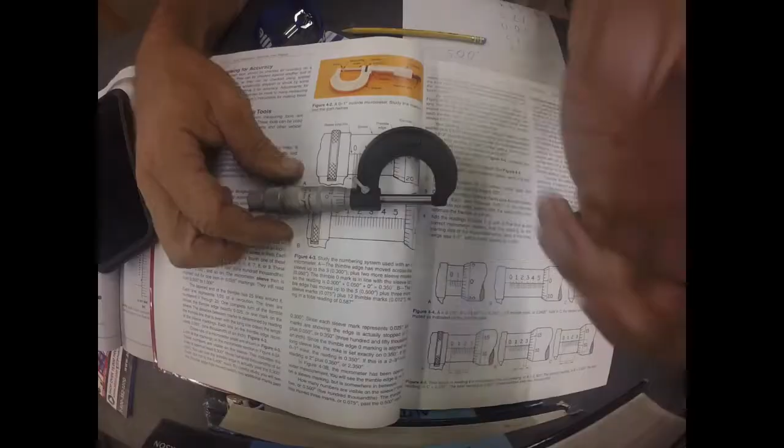Okay guys, welcome back. What you are looking at is a micrometer, this one is a 0 to 1 inch. Right now there is 0 gap in this piece of metal. Each one of these lines is equal to 1/1000th, so that would be 1/1000th of an inch opening. You can't even see that there's a gap there right now. I can't even fit a piece of paper or a human hair in between it. That is 1/1000th of an inch.

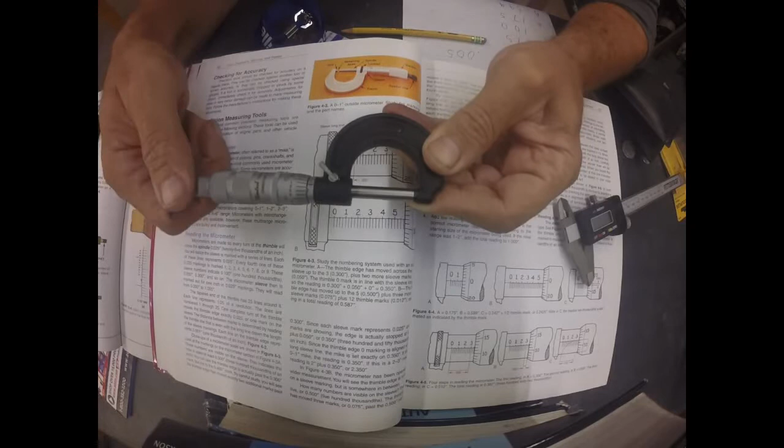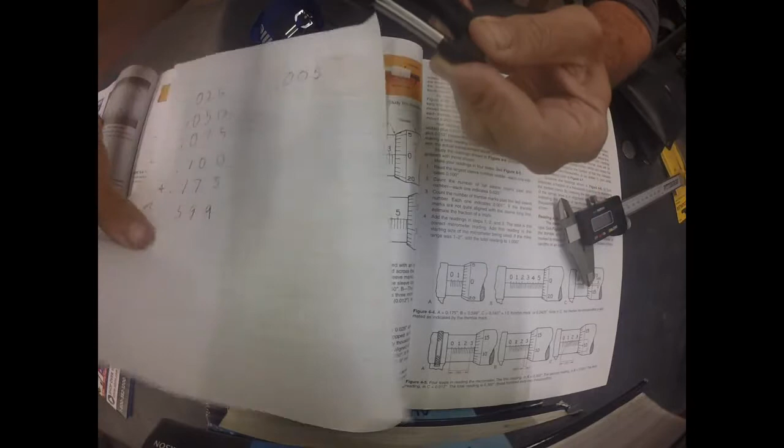You can tell now that I'm opening it, so now you might be able to see the gap. But I had it at exactly no gap, 0 on 0. I'm trying to teach you how to read this. So the first number I'm going to come to is opening it up to 5/1000ths. There's a very small gap. What that looks like on paper with math would be 0.005. When we go to cut rotors, that's about how much material I remove every time I make a pass on the rotor. Let's move to the next number.

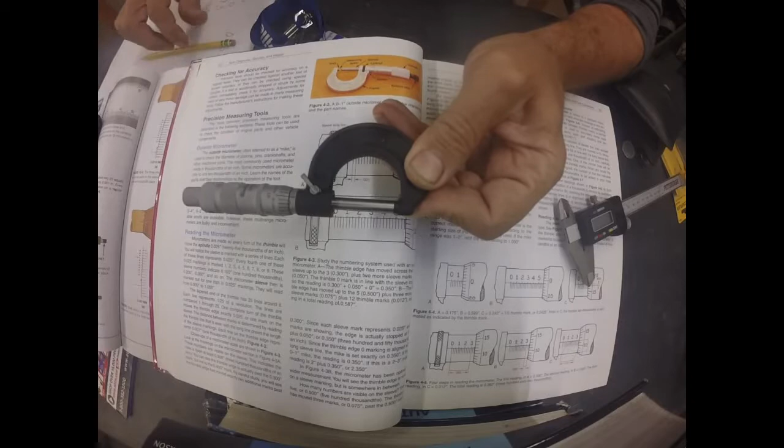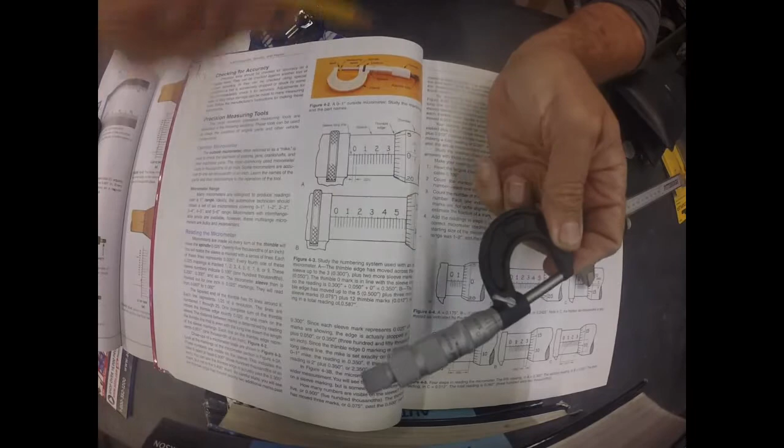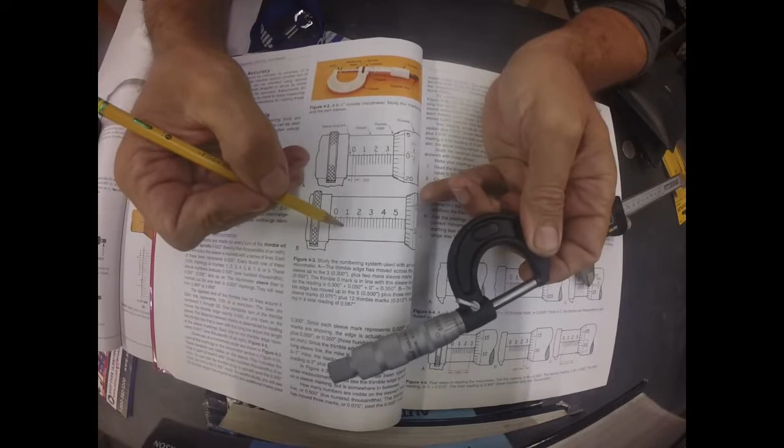So we're going to go to 0.025. I'm back at 0 again, but now we have one full line. If you look at the sheet, I have moved this piece right to this line. When 0 is lined up with this very first line, that is 0.025. This is easy to remember if you think about money, each one of these lines is equal to a quarter. So we have 25 cents, 50 cents, 75 cents, $1. Right now I have it at 0.025.

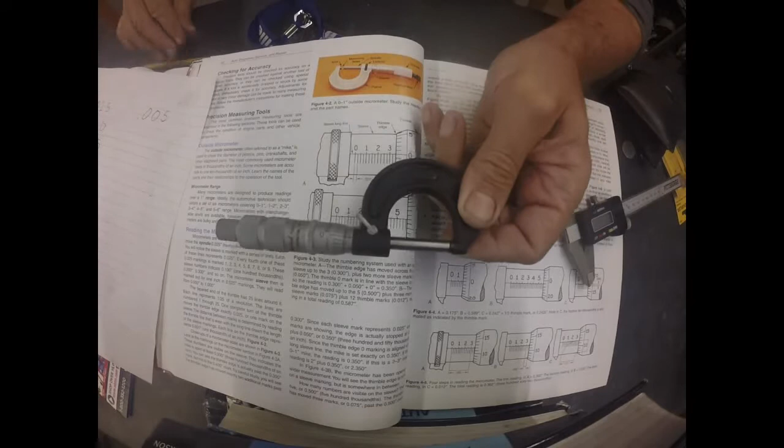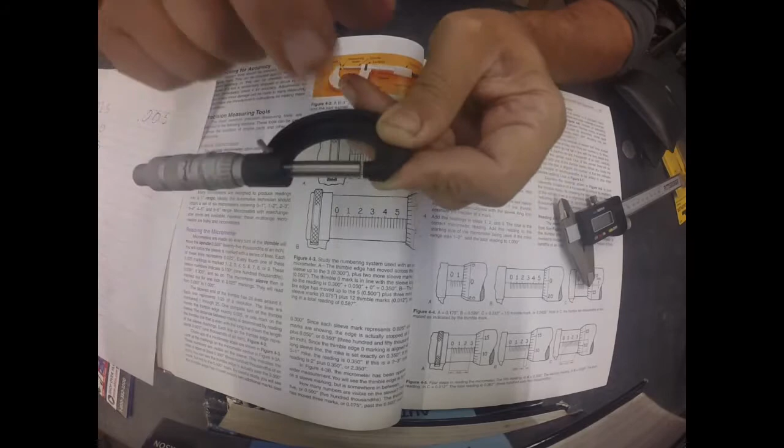Now I'm going to open it up another 25/1000ths. So I got 5, that would be 30, 35, 40, 45, now we're back to 0, 50. Now you can see there's a gap, that's 50 thousandths. So what that would look like in a decimal would be 0.050. Very small gap in my tool.

Now the next number we're going to do is we're going to go to 75. I'm going to go, now we are at 50, 55, 56 — see how there's a little 6 there? That would be 56 — 60, 65, 70, back to 0 again, 75. Now there are 3 big lines, so what we're looking at is that we are right there. We have 3 lines: 25, 50, and then 75. So 0.075.

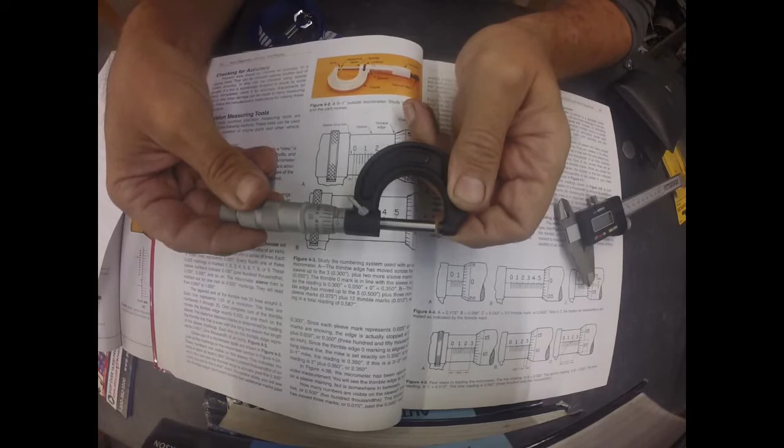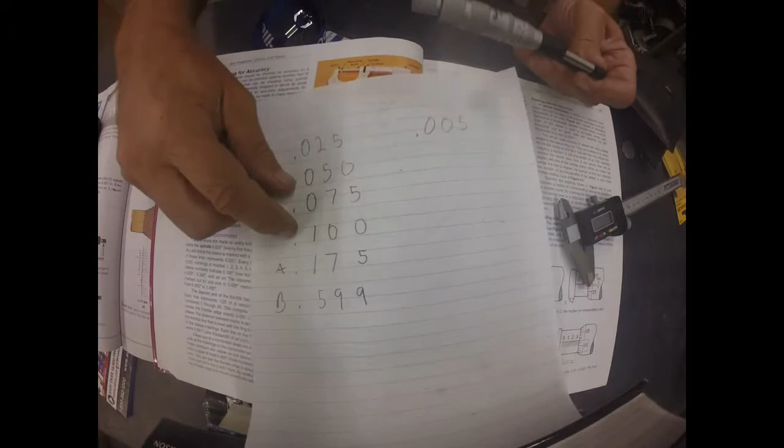So the next number we have would be 1. I was at 75, let me go back to 75: 75, 80, 85, 90, 95, 100. So if we had, say, a piece of metal we were measuring, that would be 0.100. So that would look like, on a decimal, 0.100.

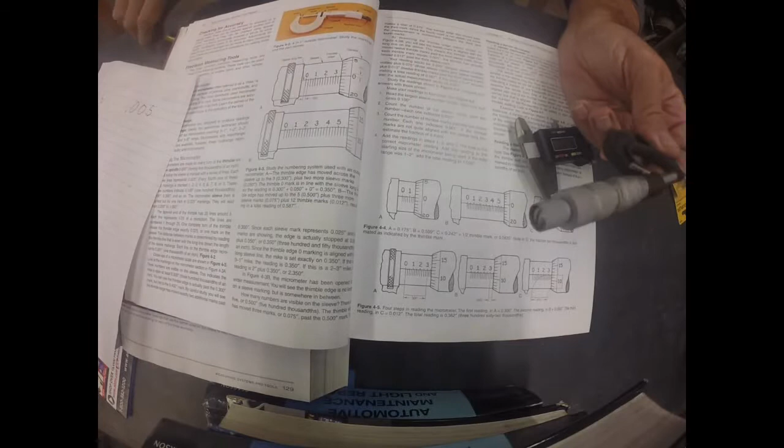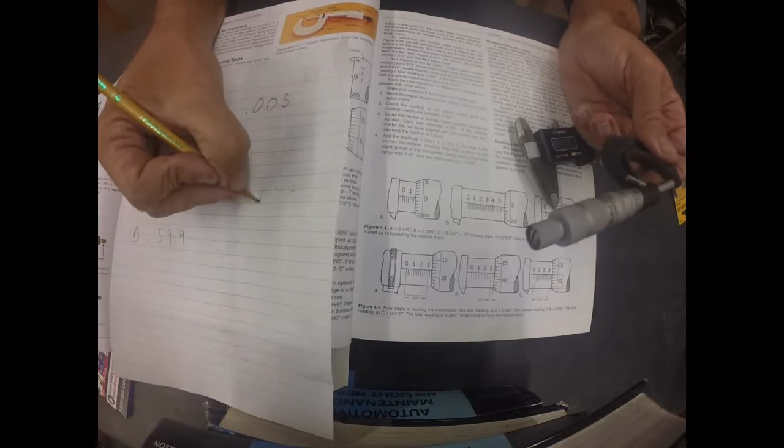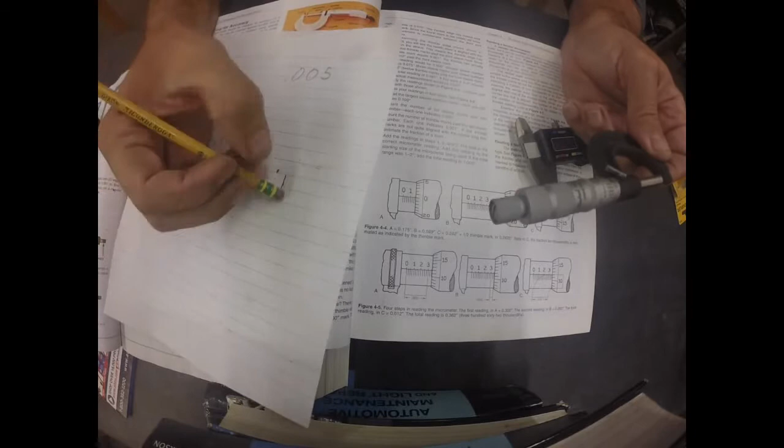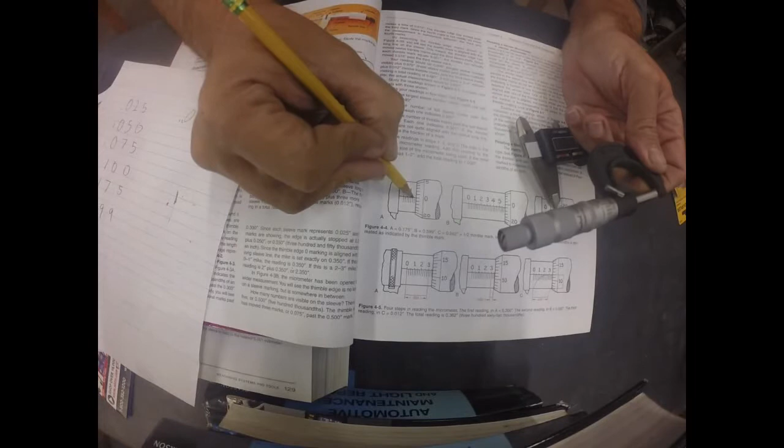So if we look at this image right here, and we start counting: 25, 50, 75, 1. Let me write that down. So I got my first decimal — ah, got it wrong, sorry, it's hard to draw upside down and backwards. So I got my decimal, and we are definitely at 1. Now we got to figure what else we're at. We're at 25, 50, and then we have this gap, and it's all the way up to 0, so that must be 75.

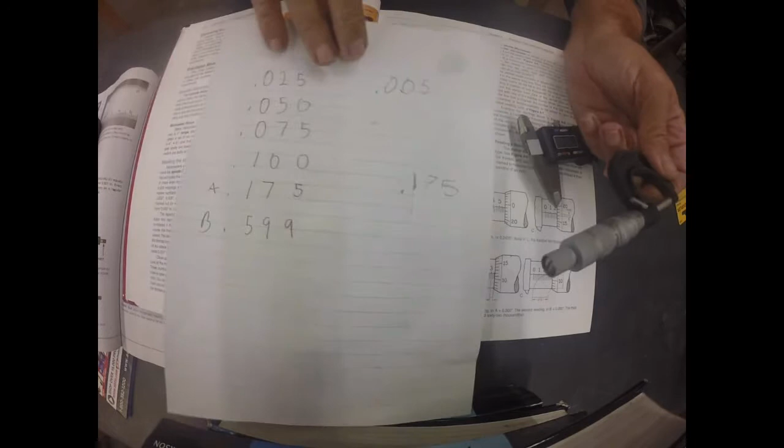So we are at 175. That's what letter A is doing here.

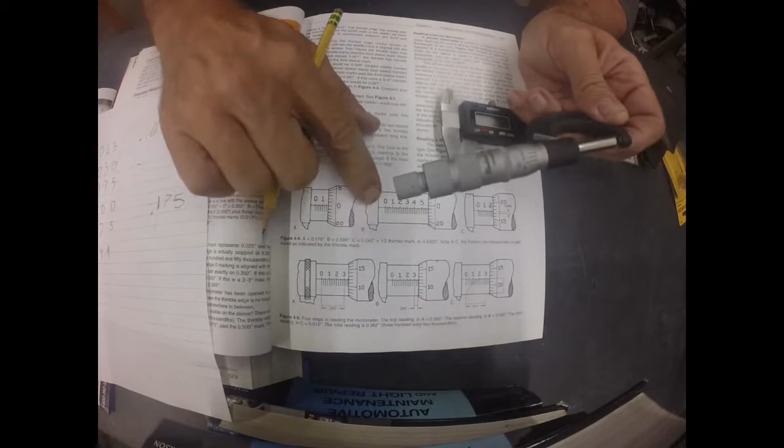Now let's try to get a little bit more complicated. So now we got this number, letter B example. So we're starting at 0. We know we got 5, because that's the last number we see. So we are at 0.5.

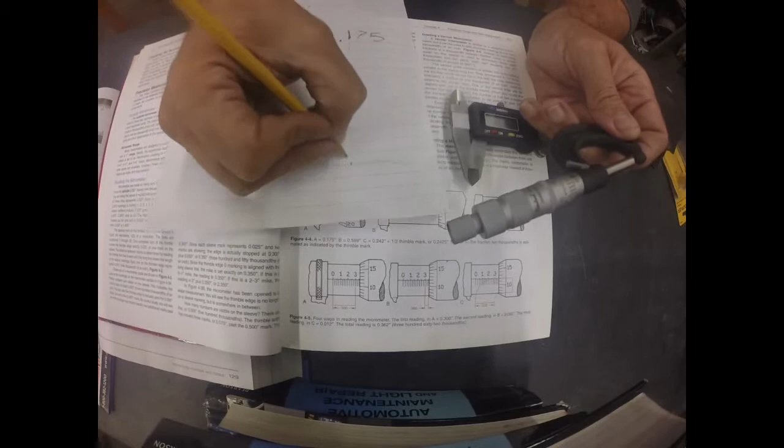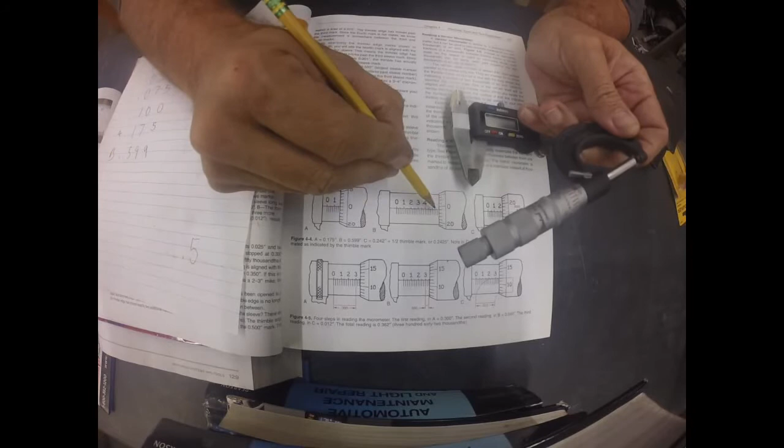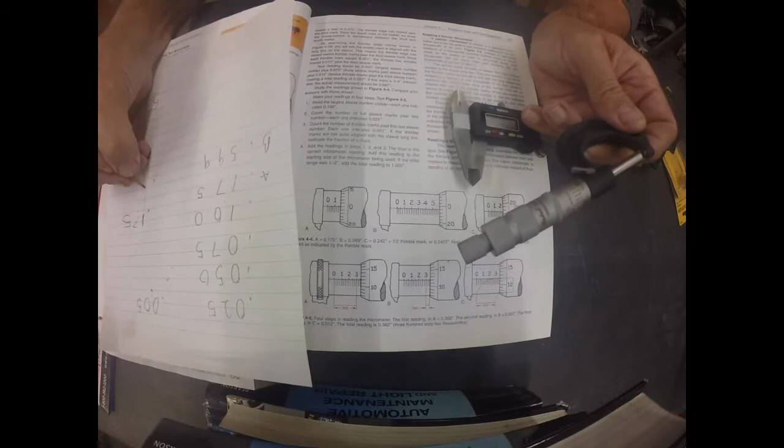I'm trying to write upside down, I don't know if I can do it properly. But let's count what we got. We got 25, 50, 75, and then we're almost all the way back to 0, but we're not quite there. So that would be 5, 9, 9. So almost 0.6, so 5, 9, 9.

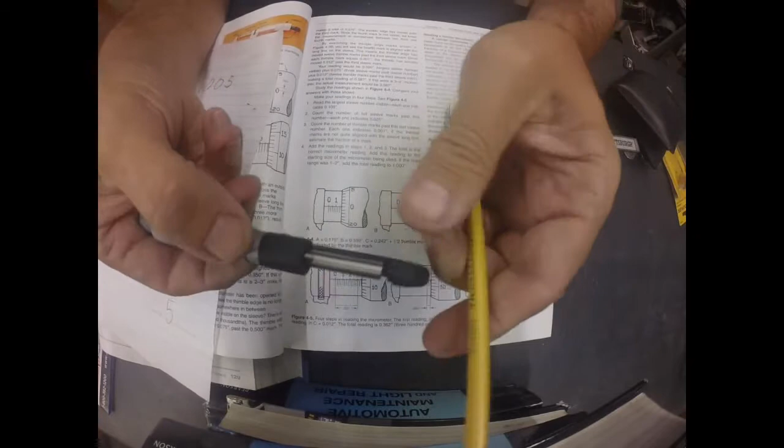Now I understand you guys probably understand decimals. What I'm going to do right now is measure the thickness of this pencil. So I'm going to put this tool in here and see how close we can get compared to my digital one, because the digital one is going to make sense, it makes it easy for you to read.

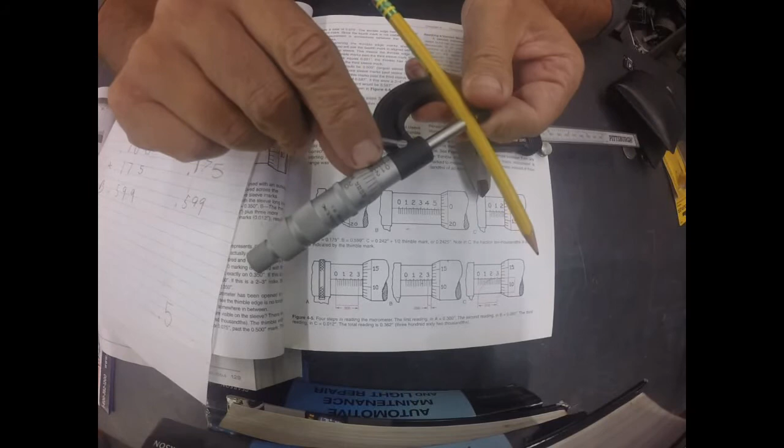So what I have showing is the number 2. So we're definitely at 2. And I have 1, 2. So I'm at 50. 0.25 and then 20. So 0.25, 20, so that is... 0.257, nope sorry, I got to write it down. 2.5, 2.6, 2.7.

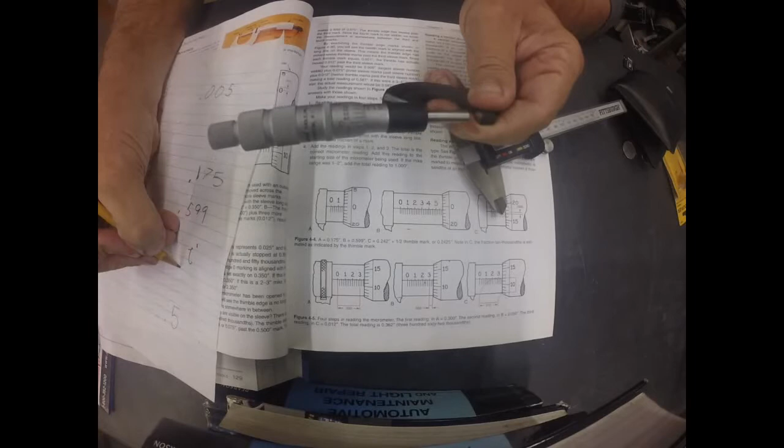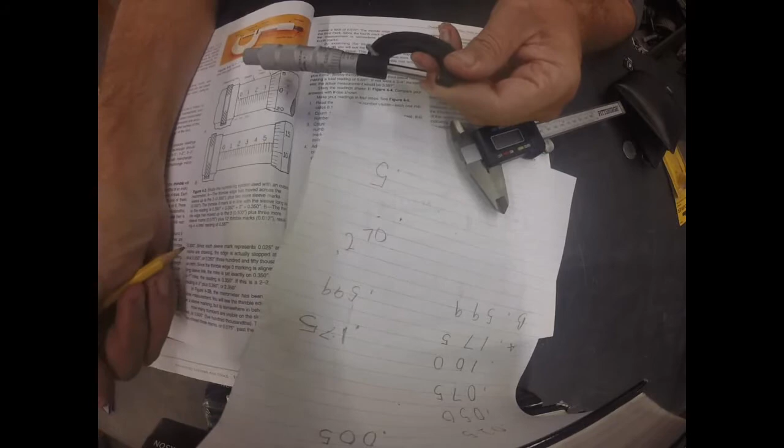2.70, that's what we're at. So let me write that in a decimal real quick. 0.2... no, 70. So what we had here on our pencil, the measurement was 0.270. Now let's do it with this one.

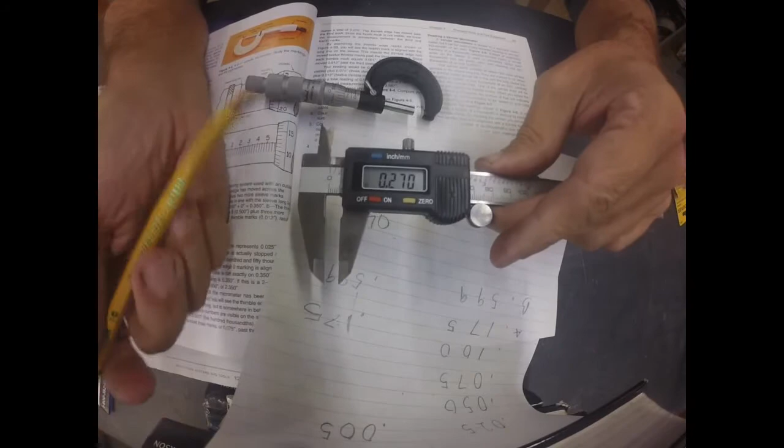We'll turn it on, make sure it's at 0. So right now we have no gap. And we will open it up. We will put our pencil in and see how close we got. 0.270, so that's the thickness of our pencil, maybe even a little smaller because I squeezed it really hard. 0.270, kind of get it? So these two thicknesses are exactly the same. So that's what the thickness of a pencil is.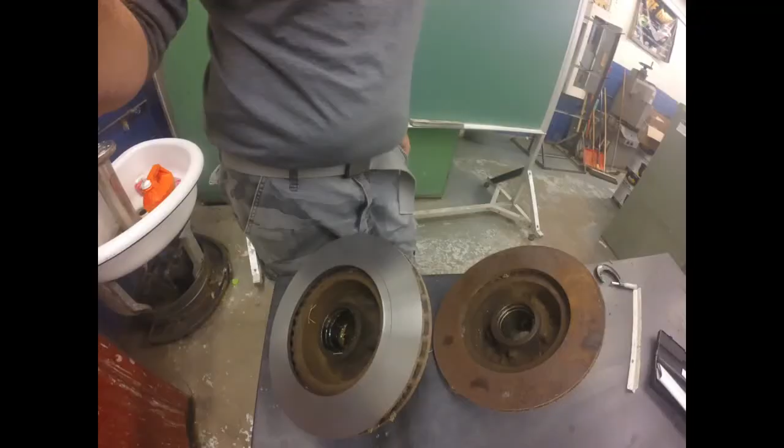Now we're going to have to measure rotors. So what I have here is 2 rotors, one that I machined the other day, one that I'm about to machine, and the rotors have what's called a minimum thickness. So I still have to look up the spec. But what you would do is go to a rotor. Now these rotors are thinner than 1 inch.

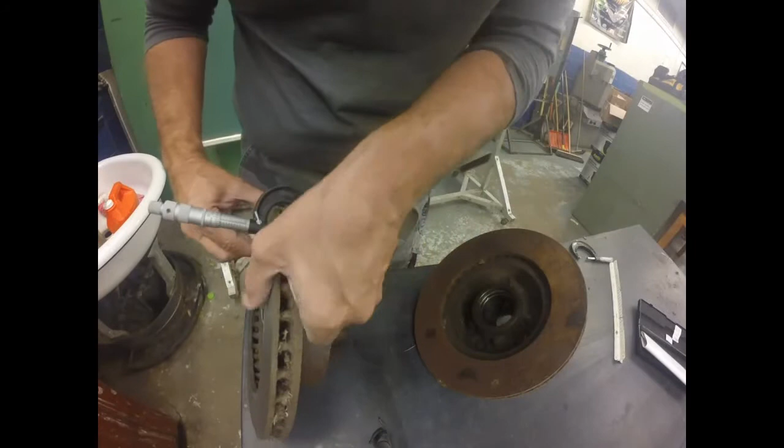And I open my tool. Now I don't want to use this as a clamp and really go down on it, I want to get it just snug. Now the reading I have on this is 9. I see the number 9, and I see one big line, which is 25. And now I'm at 11. So that would be, another 10 would be 60. So I'm at 961.

All right, now let's see what my digital says. Because I have a 9, I see one full line, 25. 25 and 10. Oh, maybe I got my numbers wrong, let me try this again. So I got 9 and 25, then I got another 10 now, which would be 35. So I think it's going to be 0.936, because 10 on 25 is 35 and one more is 36. I think it's going to be 936.

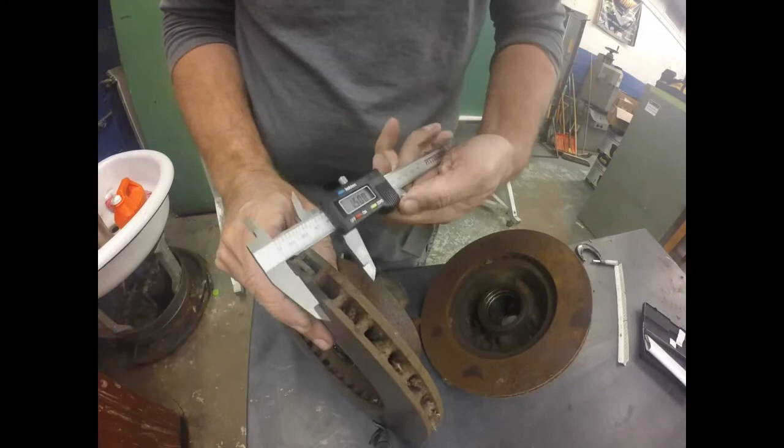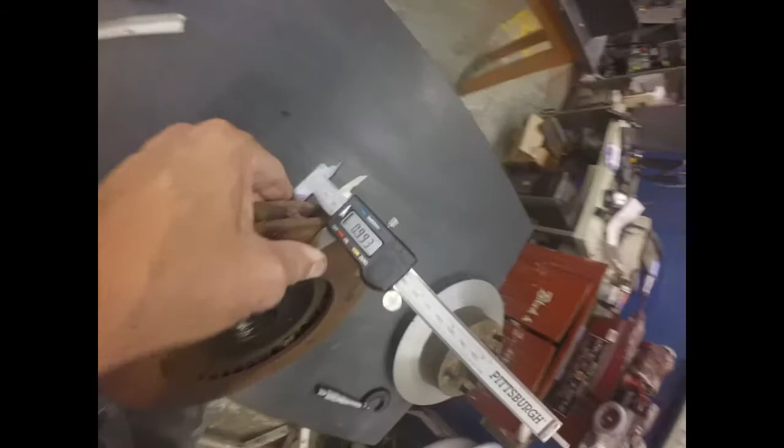All right, so now what we're going to do is measure this one and then cut it and see how much we take off. So I'm going to take my digital tool, put it on here, and we got 0.992, 0.993. Sorry, now we're going to put it on the machine and cut it.